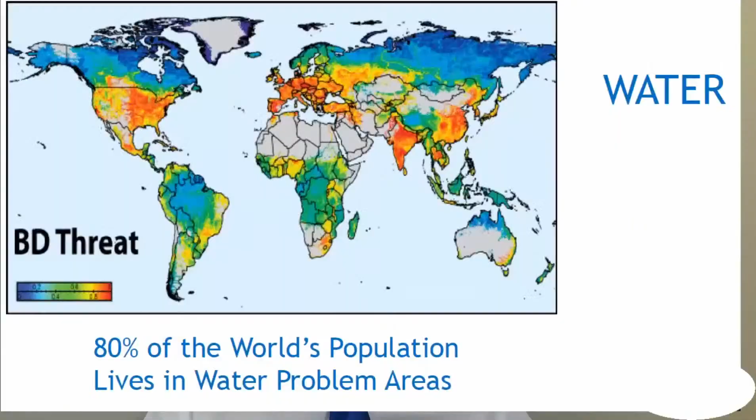Look at how little of the world's energy supply is provided by wind and solar. People who are tree huggers, and I myself am a tree hugger, I'll be very frank about that. I am very much in favor of the environment, trying to solve economic problems, etc. But the way the current situation is with alternative energy, it simply won't work.

So let me go back in history a little bit. About the year 2004, I was hired as a physicist, as an engineer, to do an energy analysis of a company called Xcel Energy. It's up in the Midwest, and they have a multi-state distribution of energy. I was doing this for a company involved in biodegradable energy sources that they were using to make into biofuel, and they wanted to understand the dynamics of energy and energy distribution the way it was at the current time. So I looked into that, and I was, in a sense, horrified by the amount of energy that is wasted simply in producing 1 kilowatt of electrical energy.

A lot of waste, because here's the problem. Anytime you burn something, people come along and say, oh, well, the thorium reactor, a fusion reactor would solve all the world's energy problems. And the answer is no, it wouldn't. Because you're taking some inert material, heating it up, creating heat, and then about 75% of that heat goes directly into the atmosphere, and only about 25% actually creates useful electricity. Or if you're burning it directly, like in a gasoline or diesel engine, probably about 25% of it, after the mechanical losses, etc., sometimes less than that. Very little of that burned energy is actually converted into useful work, something that lights a light bulb or toasts your toast or whatever.

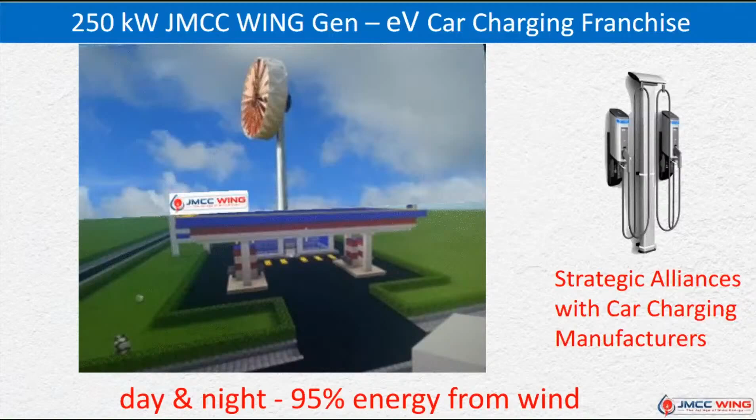Now the companies are divided into 3 sections: small, medium, and large. The small going from 2 to 250 kilowatts. The medium, called medium commercial, goes from 10 to 25 megawatts, much larger than the current 3-blade wind turbines on the commercial market. And then the large ones, this is the issue here.

The very large ones can scale up to 250 megawatts or beyond. This is what separates this device from anything you'll see on the commercial market today. I'll give examples of comparison between this and, for example, 3-blade wind and solar, showing how this is a much more economic solution because it is scalable.

And here's the issue. The solar and 3-blade wind turbines, those things that are out there scattered all over the countryside, which don't work, the wind blows right through them. They can only go up to about 10 megawatts, and that's about as big as they're going to get.

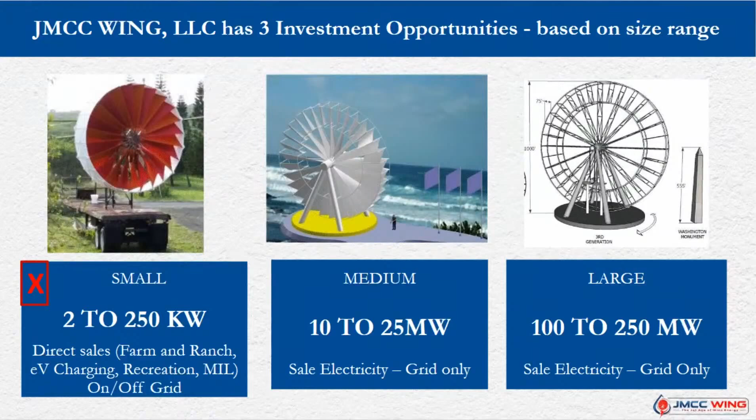Also, there's an issue with companies called General Electric and Siemens, who are the primary promoters of 3-blade wind turbines. Their main product and product line is dealing with central station power, electricity. So the wind turbine business is very strange, because in a world needing energy, in which energy is very expensive, they cannot even succeed with government subsidies. I'll be talking a little bit more about that.

I'm going to go through this because it's important for people to understand that when you see those 3-blade wind turbines, a field of them out there, and one or two of them are spinning, it turns out they have an electric motor inside of them. That electric motor is what's causing them to spin, not the wind. It takes a very strong wind for them to move. They cannot start on their own, and they have a cutoff wind velocity that's very low. So there's a very narrow range of wind speeds in which they can function.

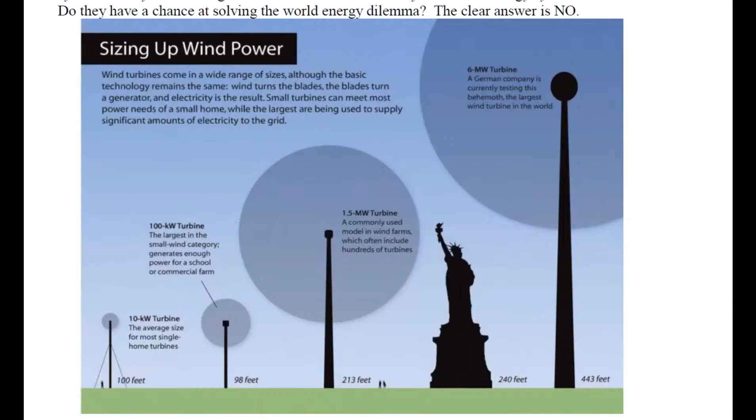The other issue with the 3-blade wind turbines is they don't scale up. The biggest they can make them is only about 10 megawatts. That's why the wing generator is designed to go up to sizes that would replace nuclear and coal power plants with a single unit, saving on footprint. You don't have fields and fields of 3-blade wind turbines all over the place—you just have a few large ones that can be out of sight, out of mind, typically offshore.

By the way, this is how it began. When I finished my efficiency study for this company, I sat down and said, good grief, the problem with solar is not going to be overcome because solar panels are low voltage—you'd have to cover entire states with them. But the bigger problem with solar is the sun only shines during the daytime. I don't care where you live, even in the middle of the Sahara Desert or the sunniest place on the planet, the sun goes down at night.

So the problem is, then you need batteries. Now you need batteries, but you also have to put in a lot more solar power to charge up those batteries so you have electricity during the nighttime. The batteries are extremely expensive, and that cost is not going to go down. And there again, you have the scalability problem in trying to solve the world energy problem.

So this was my main primary focus. My main question was, will this technology solve the world energy problem? That's the sole criteria.

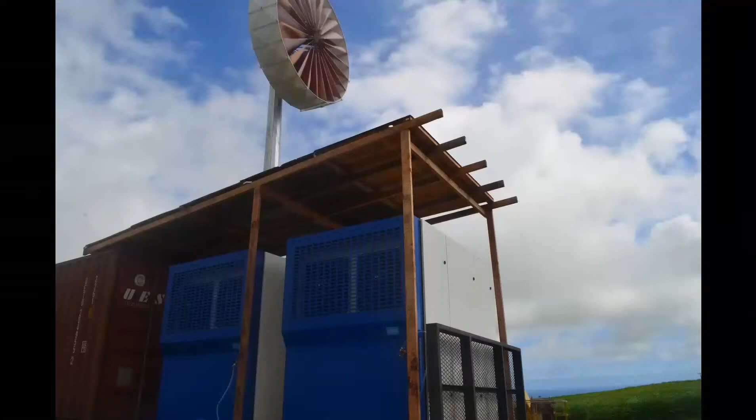This is huge for environmental interest: birds and bats see it, it's eco-friendly, and they fly around it. Whereas with 3-blade wind turbines, they can't see the blades coming around, and eagles are killed, hawks, migrating birds, because they put these turbines in passes where it's windy, which is also the migratory path for these birds. So they kill bats and birds by the thousands. It's a horrific issue with the 3-blade wind turbine. The wing generator does not do that.

I've been on installation sites with the wing generator. Once I saw a bird come up to it, look at it, actually hover, and then fly around it. Birds and bats see them and detect them and do not fly into them. The wing generator is low RPM internally, so you don't have that high-frequency EMF problem that affects people nearby, whereas the 3-blade wind turbines have a transmission inside that causes them to generate very high frequency EMF and cause problems with people who live near them.

This next point is a huge one: all the heavy equipment is on the ground with the wing generator, so you can see my functional specification coming out in this list of improvements. Whereas all of the heavy equipment in a 3-blade wind turbine is up on top of the tower, so when you maintain it, you've got to get up on the tower and lift it with cranes. It's horrifically bad.

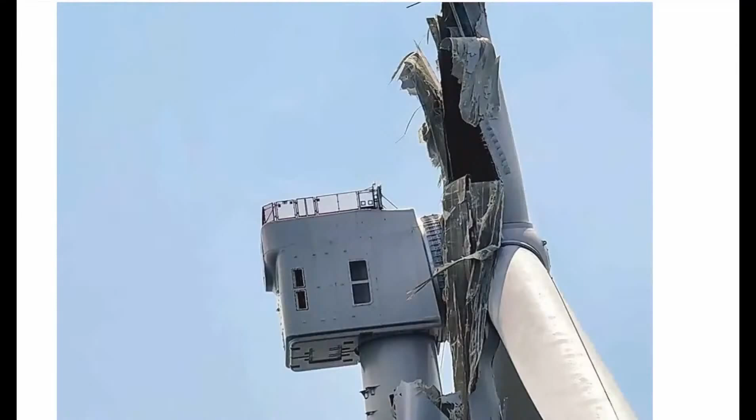Absolute absurdity. This is one of the things you do—say you're building boats or airplanes, things you want to make big someday. There's something called scalability in mechanical engineering and in electronics. If you want to make something bigger, you have to be able to scale it up, and all of the factors in the system have to scale up.

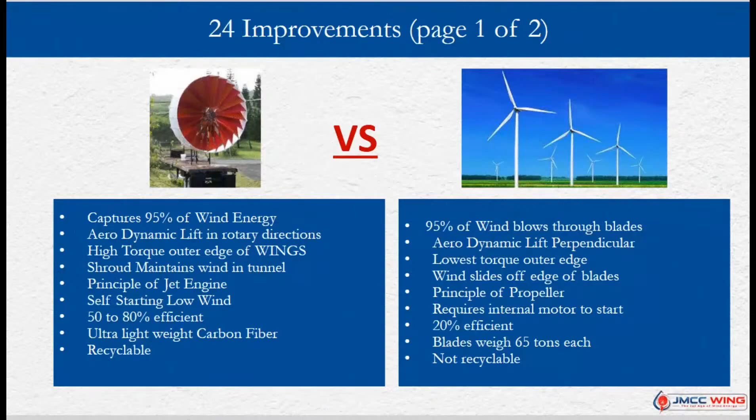When I designed the wing generator, I didn't sit down and design it. I wrote up all of the things that are wrong with the 3-blade wind turbine system, and I said the new system has to overcome all of these things. That long list I read to you came from my functional specification, because I knew full well that the 3-blade wind turbines would fail.

And that's what's going on. So after I realized this, when I started designing the wing generator, if I varied outside of those design parameters, I'd say, oh no, this is not good, I've got to get back within these 24 improvements. And thus the wing generator was born.

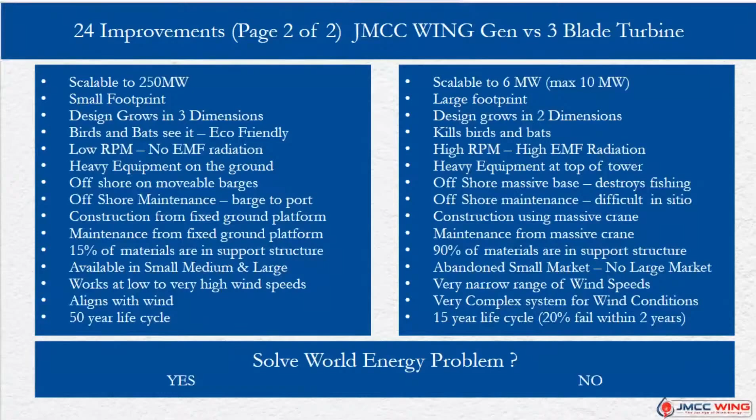Now I'm going to show you a whole series of slides and talk about them. The first one deals with comparing the 3-blade wind turbine with the wing generator.

Next, this is a comparison of footprints and other factors related to the JMCC wing generator, the three-blade wind turbine, and solar, for a 100 megawatt system—large enough to power a small town. The wing generator needs 2 acres of footprint, versus 375 acres for the three-blade wind turbine, and 600 acres for solar. The number of units to make 100 megawatts would be one wing generator, 125 three-blade wind turbines, or 600,000 solar panels of the 400-watt variety.

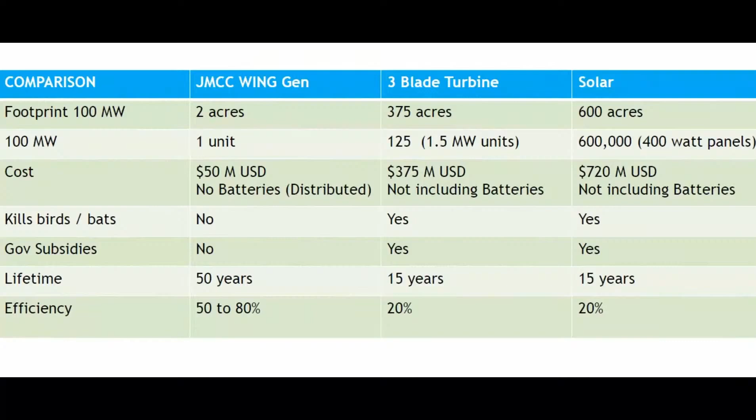And then overall efficiency, converting the energy source into usable energy: the wing generator is between 50 and 80%, three-blade wind turbines about 20%, and solar, being generous, also about 20%, because as solar panels get hot, which they do, they lose efficiency. So anyway, that's something to look at.

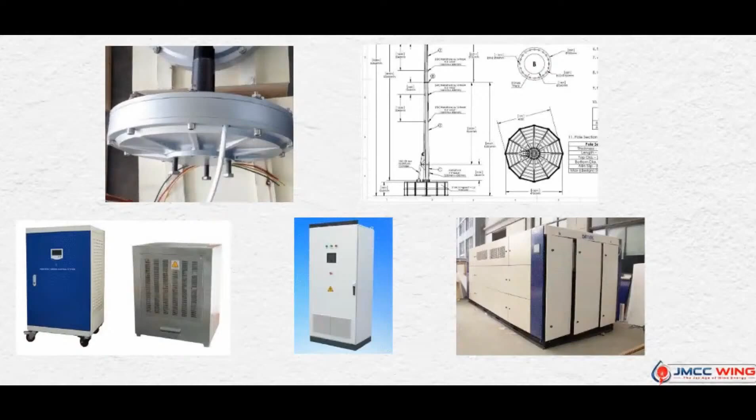Okay, so on and on, there's many other uses for the wing generator and hydrogen.

Let me see here, having a little problem getting the slide there. Okay, energy, water, food, local solutions. Now this is an idealistic drawing using the grow towers, which you can see in the upper right-hand corner, growing food. You have the wing generator in the background providing electricity and clean water. So all of this is an idealistic, futuristic city that really is something that is feasible.

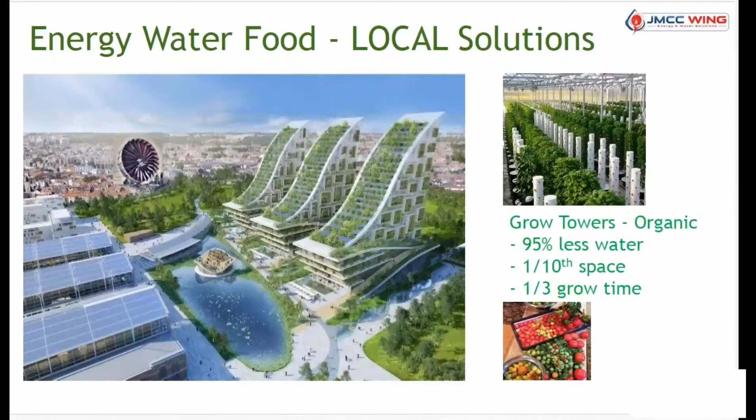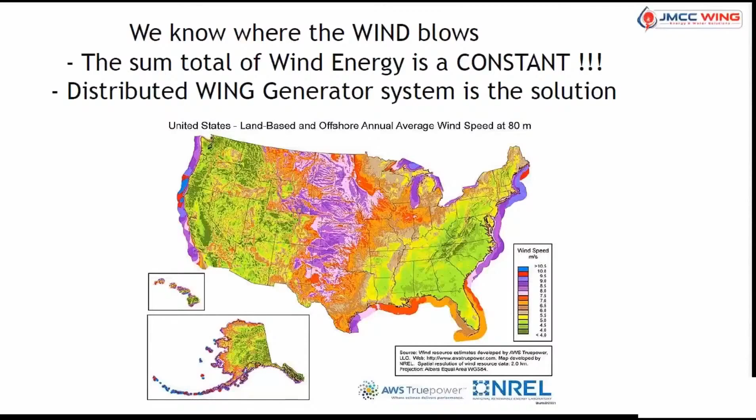Here's a wind map of the United States, and we have these maps for all over the world, but you can see the regions that have very high wind potential. We know where the wind blows, we just have to get the right equipment in those locations to capture the wind and convert it into electricity.

And like I said before, if your energy is coming from coal or some other fossil fuel, which is a misnomer by the way, or if your energy is coming from nuclear or coal, it is not green energy. And I have to make a comment also: my advanced physics degree is in nuclear and solid state physics. And when people talk about nuclear energy being green because it doesn't produce carbon dioxide, nuclear power is one of the most horrifically bad, polluting forms of energy on the planet, because the fuel, even if they're safe, which they're not...

Most of the installations in the United States, less than 100 now, are leaking in the ground. The pipes are leaking, they have no way of testing these. They're all hitting their limit of lifetime, and nobody's talking about this. They don't have the money to shut these power plants down, so they keep looking for money to try and keep them operating. They're way past their designated lifetime, and they're burning fuel that is what they call high burnup nuclear fuel, that was never meant to be burned in these facilities. So the U.S. nuclear situation is horrific, and this is from a purely scientific engineering standpoint.

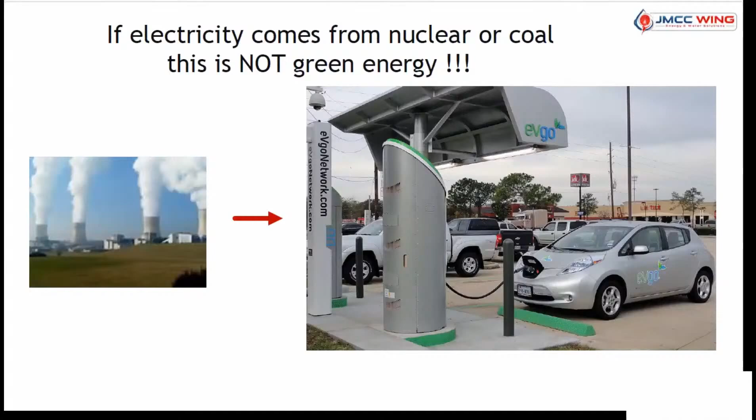In the early 2000s, I started a campaign talking about the myths of alternative energy, of three-blade wind turbines and solar, as a result of the study I was talking about, and tried to get the word out that the direction they're going is really wrong.

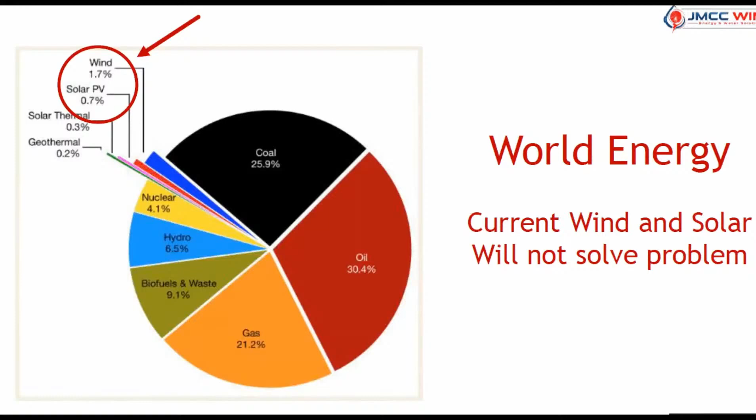The whole point here is that we knew back then, in the early 2000s, that this three-blade wind turbine and solar panel concept would not power the world. You can see by the chart I showed at the beginning of this show that even today, with all the installations of wind power and solar, it's only about 1% of world energy production. So how can you multiply that by, say, 100 and fill the world capacity for energy? It's just not going to work. It's simply not going to work.

That's why I designed the wing generator as something that will work. At this point, people are probably asking, well, if it works so well, why isn't it being funded on a national scale, etc.? The answer is that the government protects the energy interests, and the energy interests are not interested in funding something that works.

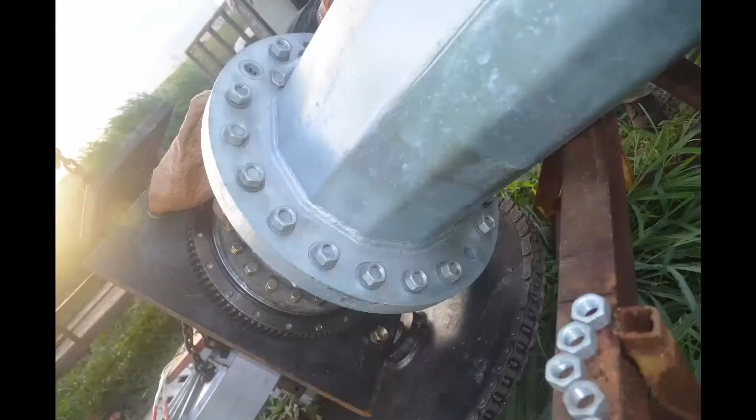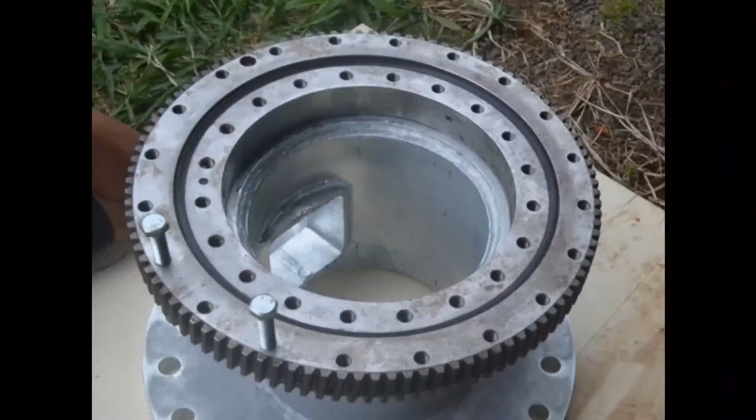So when you see advertisements, YouTube videos, or articles touting some new alternative energy, things that bob in the waves or whatever it is, they get funded if they're not going to work. Anything that's really going to work is not going to get funded, because the big money people who move the large amounts of money around the planet are all heavily invested in standard forms of energy, and they don't want to see something that comes along that works.

Why do you think General Electric and Siemens are selling 3-blade wind turbines? Because it doesn't compete with their main core business, which is central power energy systems. So anyway, the myth of alternative energy is a very complicated topic.

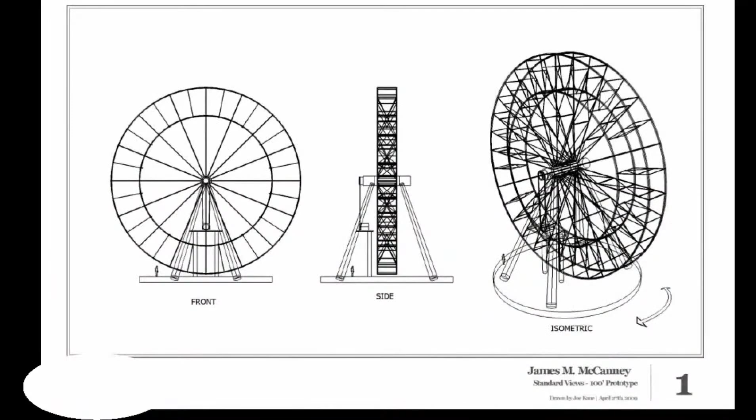These are engineering drawings from early in the development of the wing generator, showing the little person on the left-hand side at the base, just giving you a feeling of scale. There's an artist's conception of a 100-foot prototype wing generation system, and of course this is just the frame, not the actual system with the wings inserted.

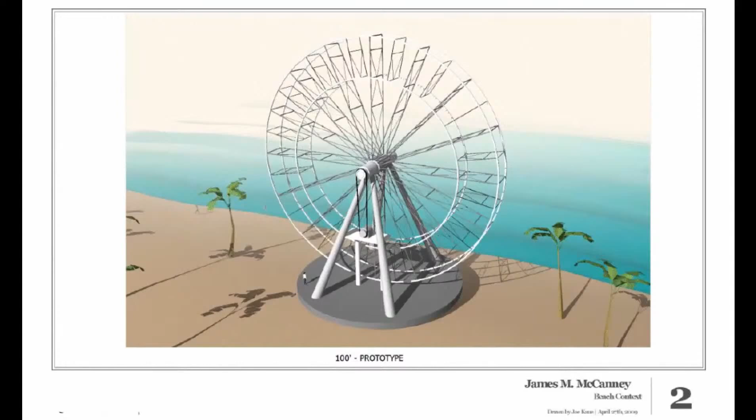Here's a scale from 100-foot tall to, you can see it growing in 3 dimensions, up to 1,000-foot tall units. It's estimated, I won't give a final number, but the large 1,000-foot tall, 75-foot deep wing generators would be enough for a single unit to replace a nuclear or coal power plant.

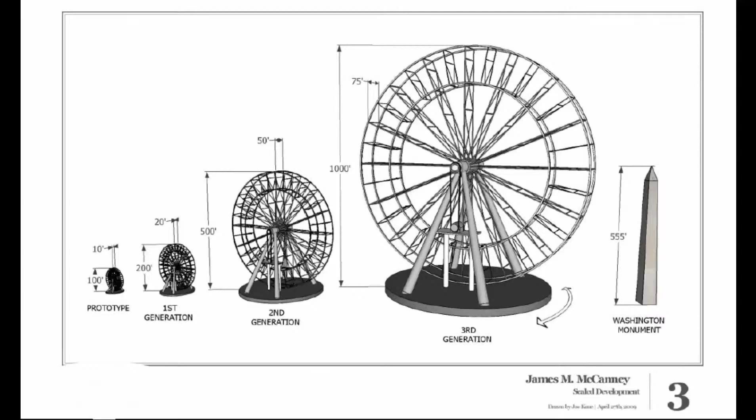Tesla's concept was to extract energy from the atmosphere, from the vertical electric field, and then distribute it underground. For small localized operations that would work, but on the scale of electricity we use today, it simply will not work. And it's very dangerous technology - it would kill birds, and cause a lot of problems.

Whereas with coal, or burning thorium, or fusion, or any other energy source - geothermal, burning nuclear fission products, etc. - all of those create heat, and they use the Carnot cycle, which, after you remove all the inefficiencies and mechanical losses, leaves you around 23 to 25% efficient. All the rest of that energy goes into the atmosphere. So I wanted to show this.

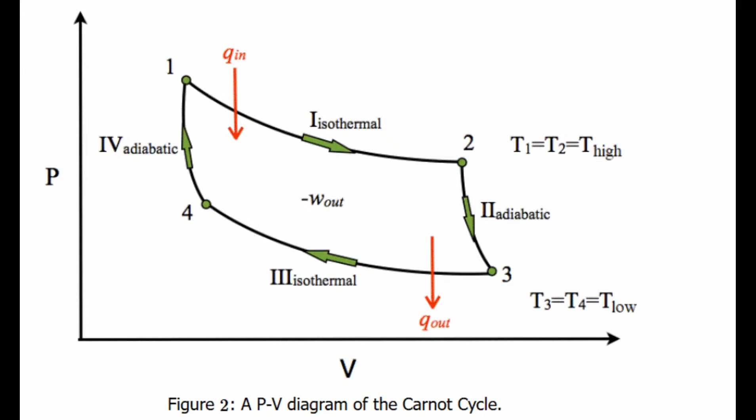Hydro dams are very efficient. They're a very good source of power, very reliable, but they depend on the rain. And they built this out in the middle of the desert where sometimes it doesn't rain. And if it doesn't rain up in the mountains that feeds that lake, then you're simply without power.

Nuclear generation, a typical nuclear power generator is 560 megawatts, and there's over 75,000 tons of nuclear waste stored in our nuclear facilities because they don't know where to put it. Horrific. Anybody that says nuclear is green is out of their mind, they simply don't know what they're talking about.

And what they're doing is saying it's green because it doesn't produce carbon dioxide. That's not the problem with nuclear. It's this spent fuel, which has to be cooled down constantly. The more you produce, the more energy you have to put into cooling it down. Otherwise, it'll melt through those containers and pollute the world and kill everybody.

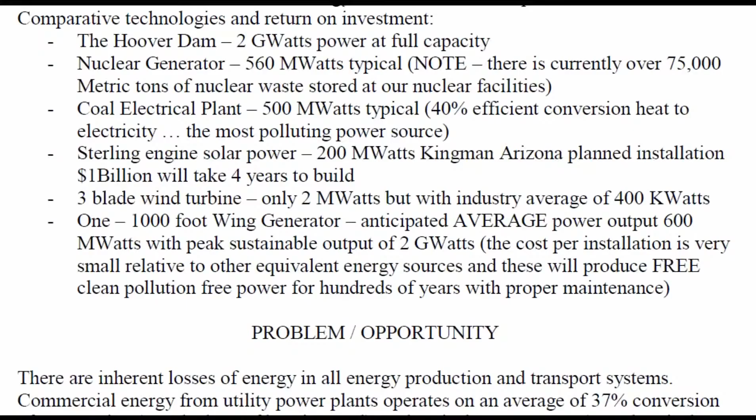I'm running up against the clock here, so I'll continue this show in the future because there's so much more material to cover. It's impossible to cover this in a single show. So we'll talk to you next week and expect some more information on the myth of alternative energy and these related topics. Very important, because energy is our number one issue.

Something we have to conquer is energy, and it's doable. It's very much doable, but we need the politicians, we need the people who are tree huggers like myself, to realize that the road we're going down is the wrong road. Three-blade wind turbines and solar will not solve the world energy problem, nor especially will it solve the problem in first world countries, where energy demand is growing and growing.